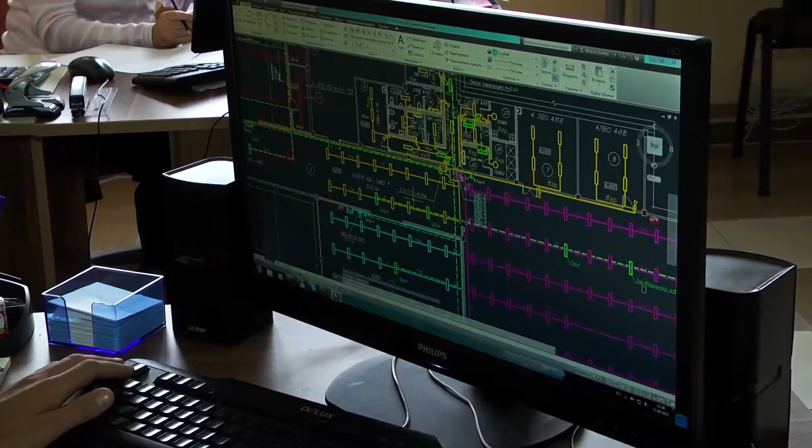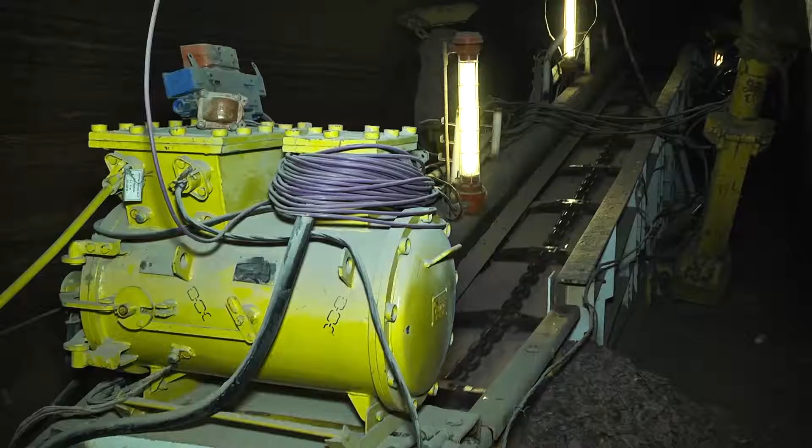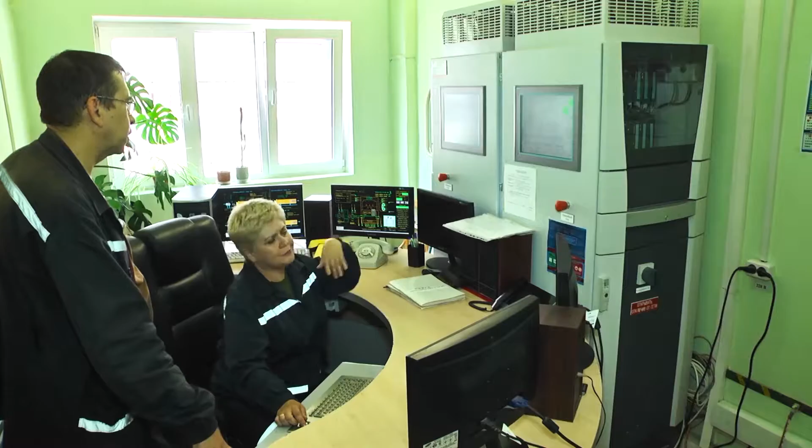Limited liability company the Institute of Mining, Electrical Engineering and Automation is an engineering company which has significant experience on different projects. The Institute carries out complex turnkey projects, scientific research and design works in the mining and chemical industries, designs objects of different complexity, develops technical solutions on change and modernization of equipment, carries out mounting and startup of technical devices which are being used on dangerous industrial objects, and manufactures and services mining electrical equipment and control apparatus, also in explosion-proof

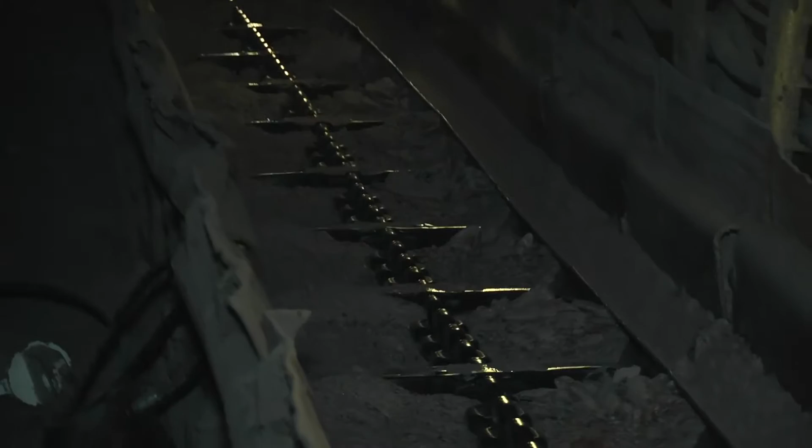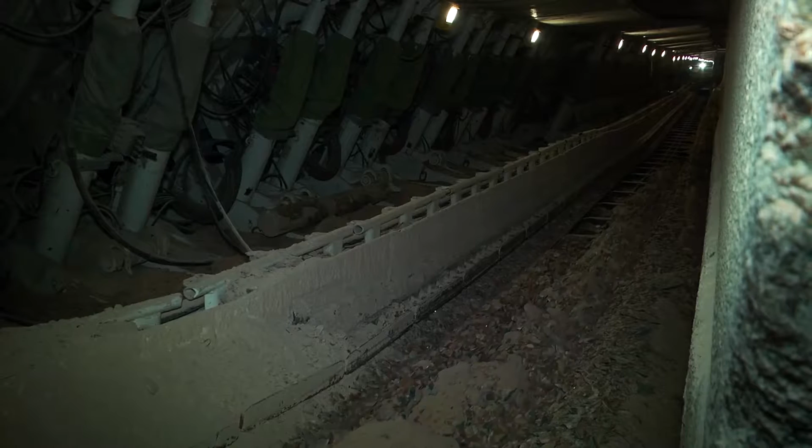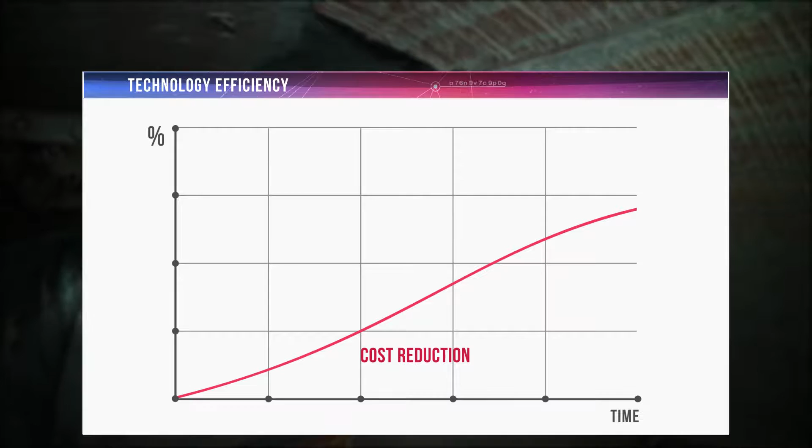One of the main purposes of a potash mining enterprise is increasing production volumes of minerals through operational excellence with simultaneous cost reduction. The planning of mining works and ore transportation by mining conveyors becomes relevant for providing optimal ore quality, continuous conveyor loading and equal ore entry to the shaft at a general cost reduction for transportation, accumulation of ore on conveyors, and start of the conveyor transport from the loading place.

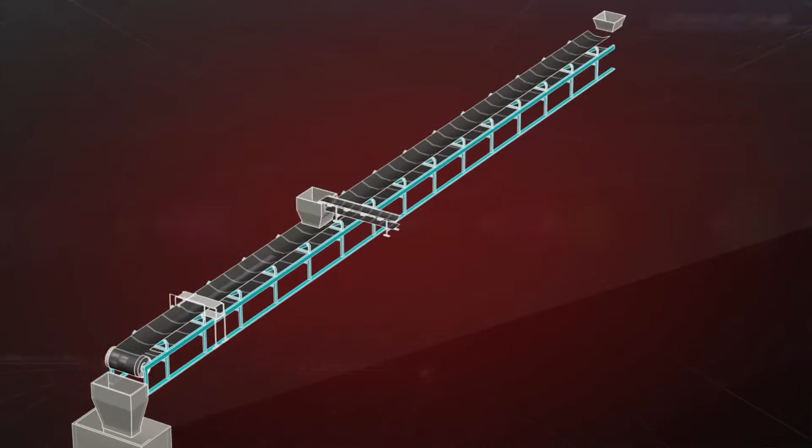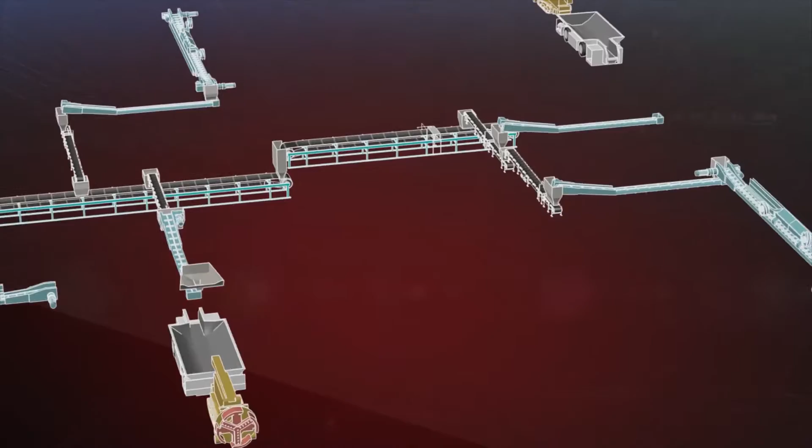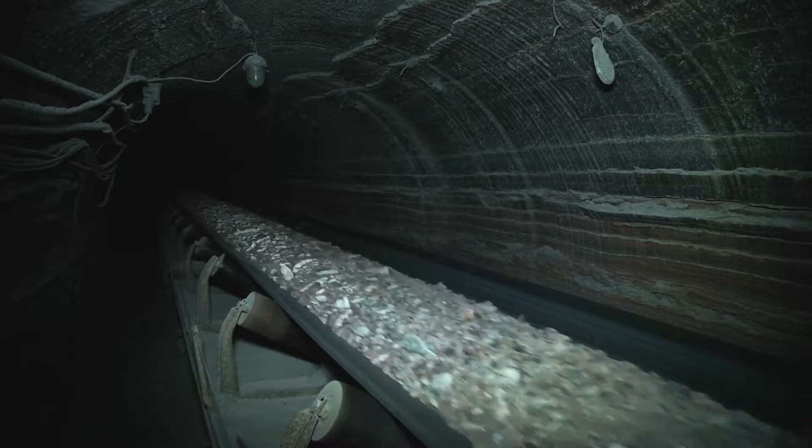To solve these problems, the Institute of Mining, Electrical Engineering and Automation developed a simulation model of ore transportation by shaft conveyors, implemented as the software system Freight Traffic, which allows optimizing the extraction process. The software system includes the model of extraction processes by combined complexes and ore transportation by conveyors of the underground part of potash shafts. The suggested model was tested on the transport conveyor system at a production unit of Belaruskali Joint Stock Company.

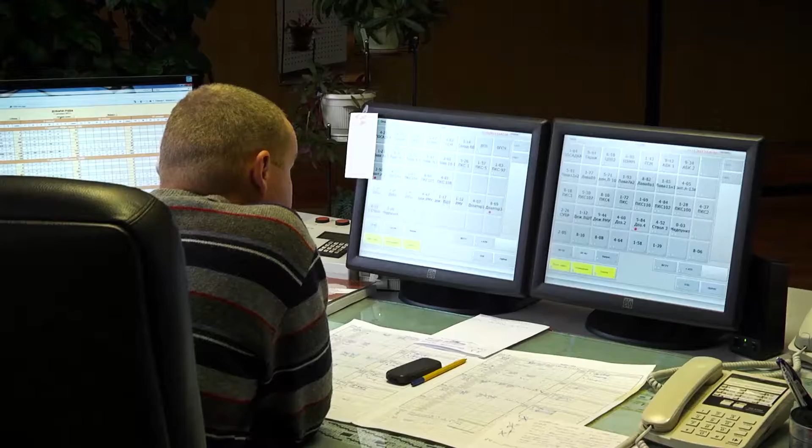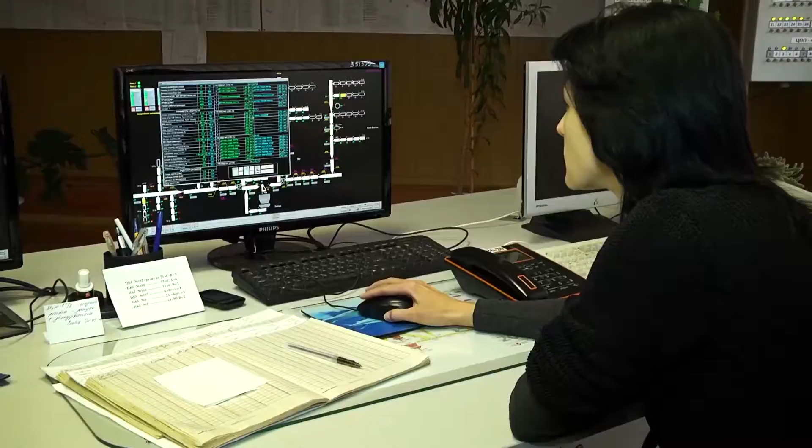Control and software systems currently operating on shaft conveyor transport are simplified and display only part of the target aspects. Ore quality composition is not counted, conveyor speed and energy consumption cannot be controlled, and there is no possibility to optimize these parameters.

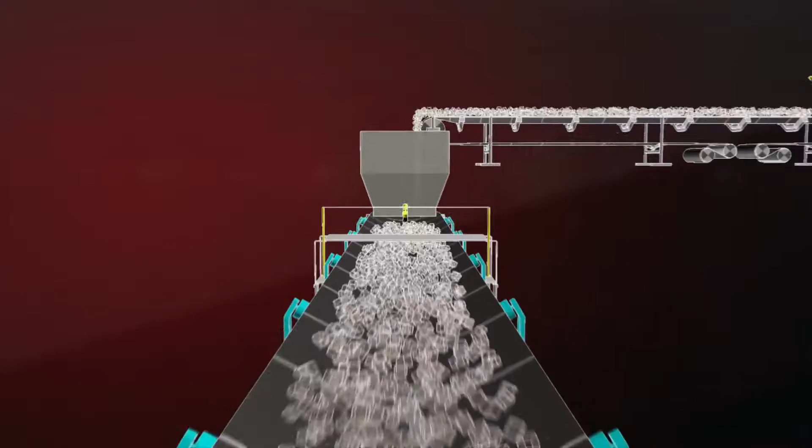The solution to this problem is a new direction in the development of ore transportation using frequency drives, a complex of microprocessor control of conveyor transport, and an object-oriented software system with a simulation model of ore extraction and transportation in the shaft. The software system controls readiness for start-up of each conveyor and mining equipment. When the readiness signal of the mining equipment comes, the software system forms the startup signal of the district conveyor. The speed of the panel conveyor is then formed, and the signal allowing startup of the mining equipment.

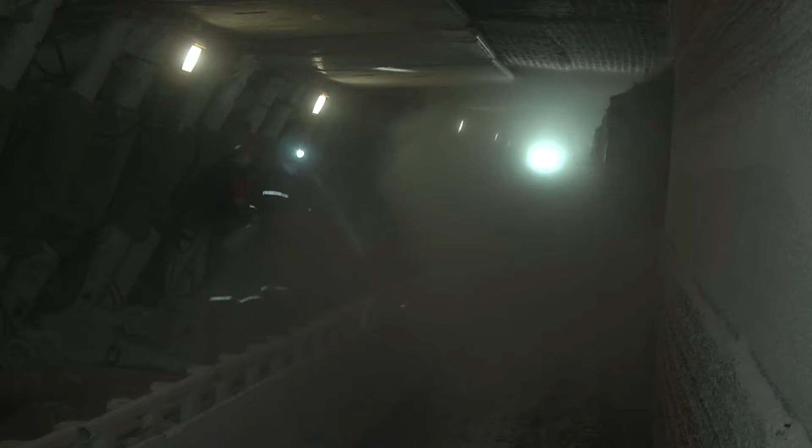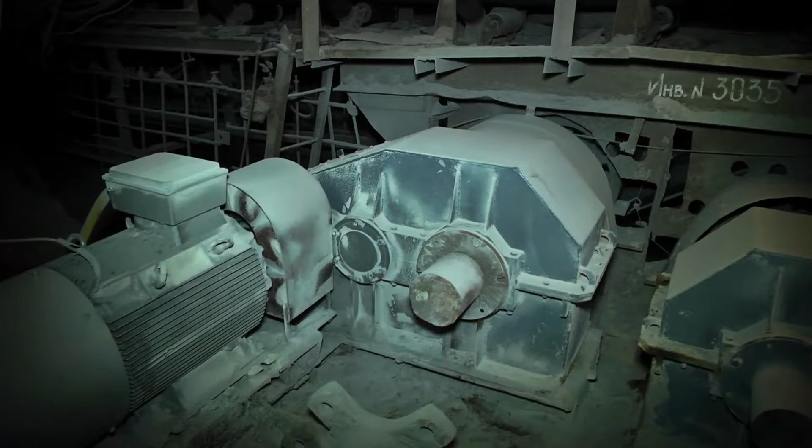Monitoring the startup and stop of mining and shearer combines and the state of shuttle car unloading, the software system inputs changes into the model of ore movement and gives the speed change signal to the central controller of the complex of microprocessor control of conveyor transport and the frequency converter of the electrical drive. The frequency converter station is manufactured by the Institute of Mining, Electrical Engineering and Automation.

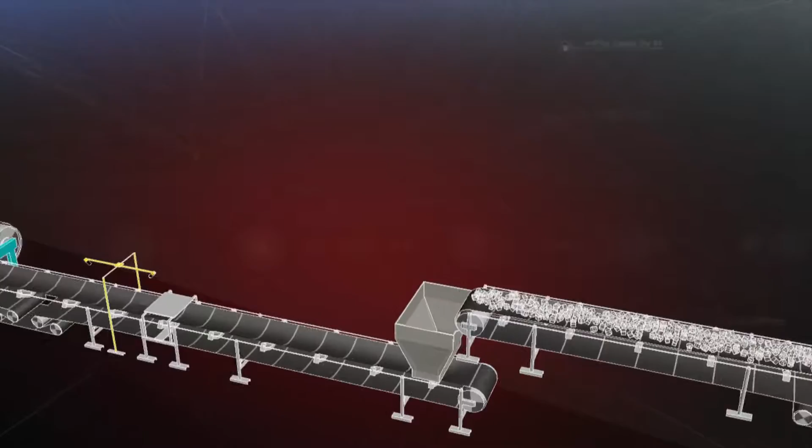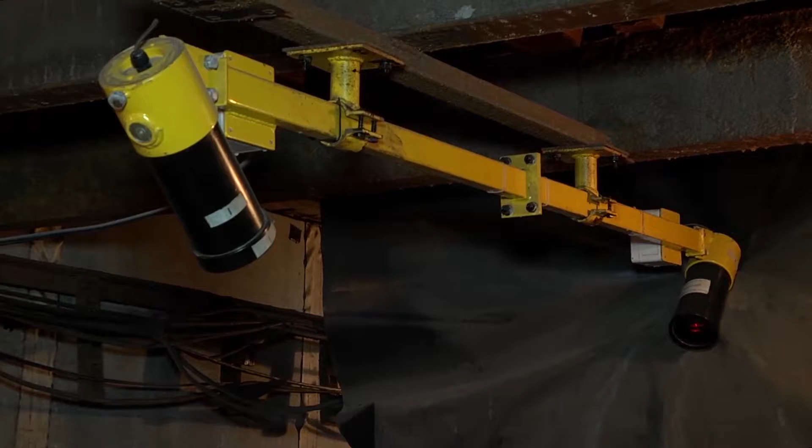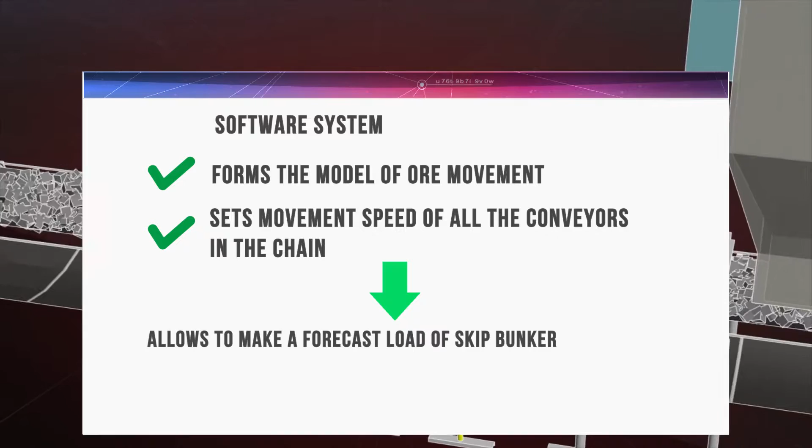The software system gives the operator the possibility to visually detect ore movement and volume from every direction, and the electrical energy flow density of the underground complex per unit of mined ore is formed. Optical conveyor scales installed on the panel and main conveyors continually transfer information about line load, movement speed and conveyor productivity. Analyzing data from the optical conveyor scales, the software system forms the model of ore movement and sets the movement speed of all conveyors in the chain, which allows forecasting the load of the skip bunker and displaying the accumulating capacity of conveyor transport in real-time mode.

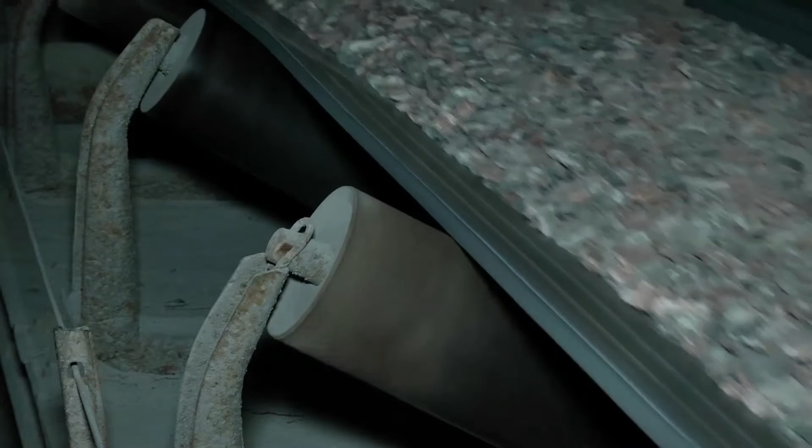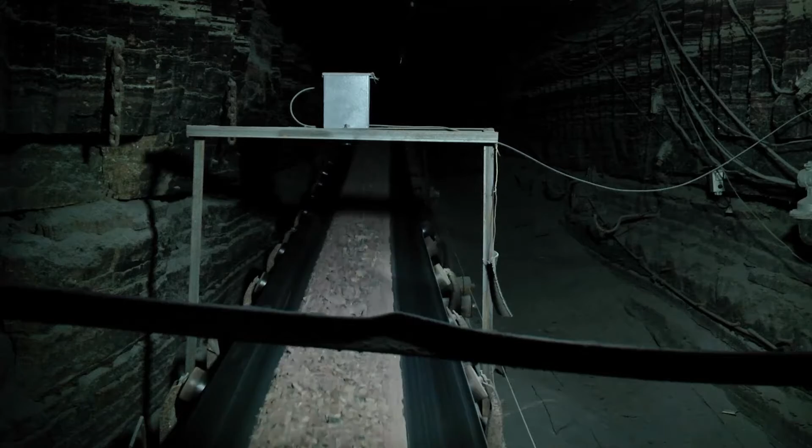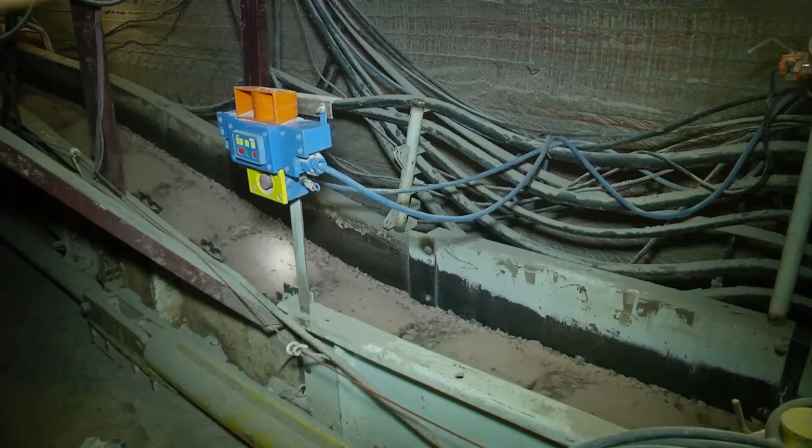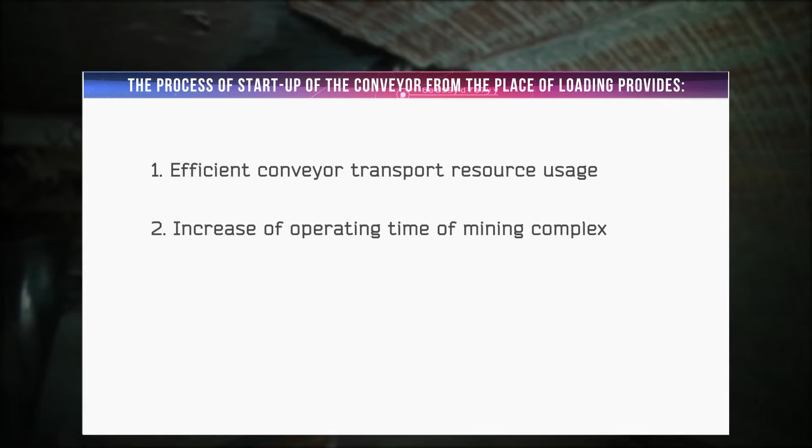Analyzing this data, the software system, according to the developed algorithm, inputs changes into the ore movement model and transfers signals about speed changes of conveyor transport on separate directions for optimal ore quantity on the main conveyors. The software system implements conveyor startup from the place of loading, which provides efficient use of conveyor transport resources, increased operating time of the mining complex, and reduced electrical energy consumption thanks to shorter idle running of drives compared with traditional conveyor startup from the bunker, reduced belt movement speed, and reduced costs of conveyor operation.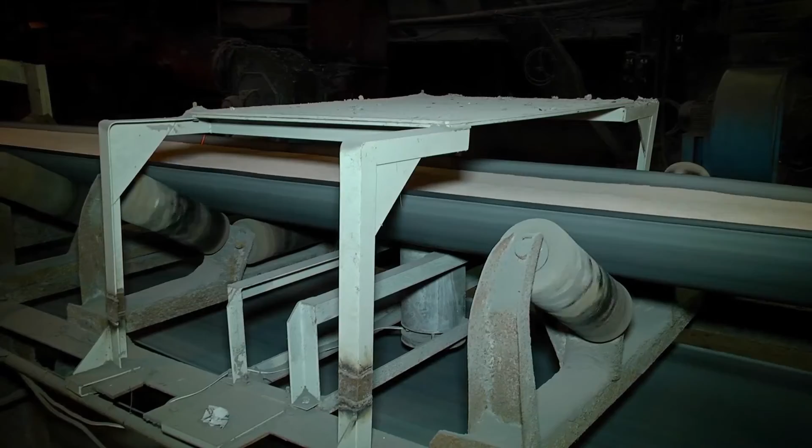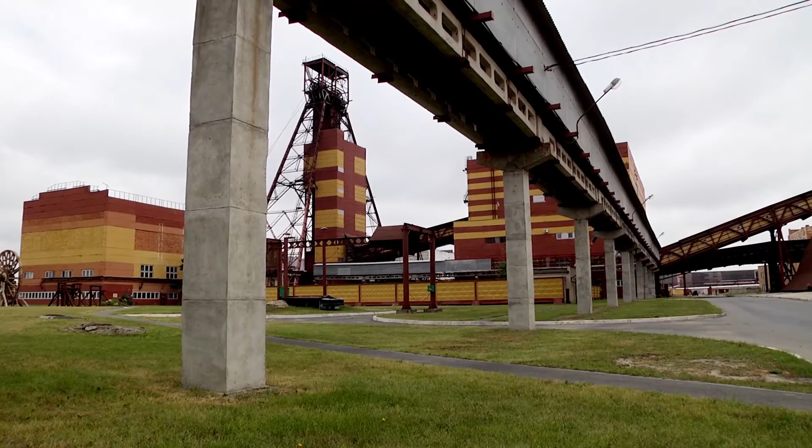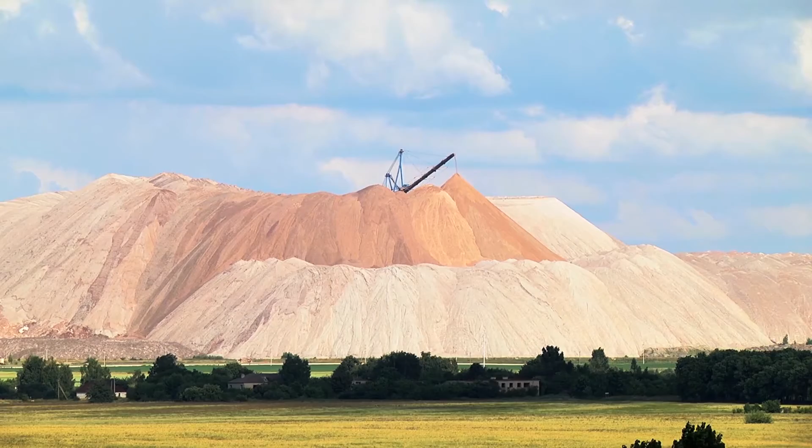The software implements the algorithm of ore accumulation on conveyor transport in real-time mode, which allows increasing winder operating time and its productivity. So, the incorporation and usage of the object-oriented software system with a simulation model of ore extraction in the shaft allows embracing in general all the possible factors of influence on conveyor transport and makes mineral delivery plannable.